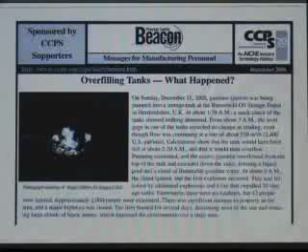Sunday, December the 11th, Sunday morning, everything is quiet. People are half asleep. They're not really paying attention to what's going on. 1:30 in the morning, stock check of the tank shows nothing unusual. Unfortunately, 3 o'clock in the morning, the level gauge stops working. So they're pumping in 2,400 gallons a minute of fuel, basically gasoline, and nobody's recording the level.

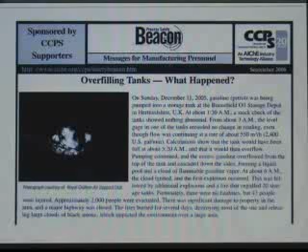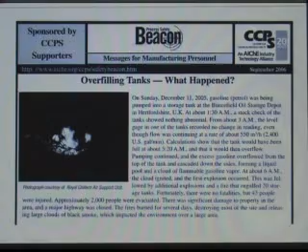And unfortunately, that means that the pump doesn't trip, and around about 5:20 in the morning, so that's 2 hours later, nobody's noticed, the excess gasoline flows over the side of the tank. And in those few minutes, until around about 6 a.m., I think it was 88,000 gallons of gasoline went over the side of the tank.

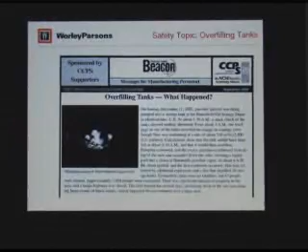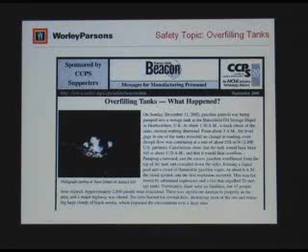Then we have what they call in the business an unconfined vapor cloud explosion. Basically, you've got an ignition source from somewhere, whether it's a spark, a passing car, or a static discharge. But once you've got the gasoline, the ignition source, the fuel, and the air, we had a massive explosion about 6 a.m. The explosion, according to the newspapers, registered 2.3 on the Richter scale. It's not a major earthquake, but it was a pretty good explosion.

Believe it or not, there were no fatalities, but 43 people were injured. This fire spread to another 20 tanks. So this is one tank, spread to another 20 tanks, and that is one of the biggest terminals in the London area, and it actually impacted flights in and out of London's airports because they were really short of jet fuel, and they were having problems refueling planes because this area just knocked out a huge amount of their supply.

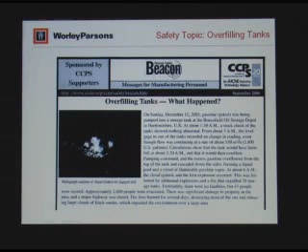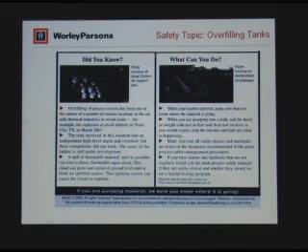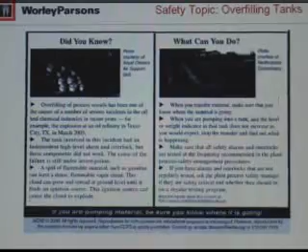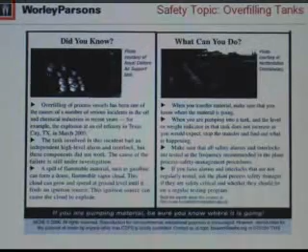Now, you might think that this is a relatively simple thing, but it can have catastrophic consequences. And basically, it's very similar to what happened at Texas City, where a bunch of people got killed in 2005. We had the overfilling of a process vessel, and the overfilled material went into a blowdown drum. The blowdown drum got to atmosphere and unfortunately ignited and killed a bunch of people. In the British incident, nobody actually got killed, but these kinds of incidents happen pretty frequently.

And they're easily avoidable, and they can be avoided by good process design with proper instruments and proper backups and things like that. But you also have to think a little bit about the system, and you need to monitor the system, because if you went into a service station and you filled up with 10 gallons of gasoline, maybe that's fine. 20 gallons, fine. But if you put 50 gallons in, maybe you start to think, well, how big is the tank? Maybe the gasoline's going somewhere else.

And this is really what people need to think about when they design systems. They need to monitor the systems. If you're pumping fluid in, you know roughly the pumping rate, you know how long you're pumping it, then you know roughly when the tank's going to be full. So you should be watching out for these situations. Obviously, they didn't set any kind of alarm, so when it hit 5 in the morning, nobody was watching, the stuff just overflowed.

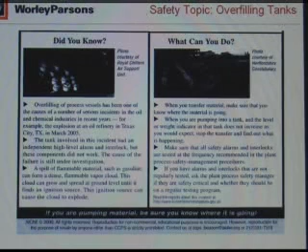And believe it or not, the stuff was on closed-circuit TV, so in the accident investigation, they were actually able to go back and view the whole thing on video. Obviously, nobody in the control room was actually watching it in real time.

Now, there's one other safety topic I have, which is a very interesting one. It's about static electricity in filling stations, petrol in Britain, gasoline in this country. Most of us are not aware that simple devices like cell phones are not what we call intrinsically safe. Intrinsically safe means that you can operate it in a hazardous environment.

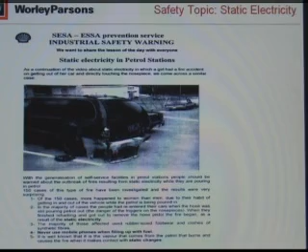So if you go into a refinery or something, normally you cannot carry a cell phone because electrically it's not intrinsically safe, so it may generate a spark and it may cause an explosion. Now the same thing can happen when you're filling up fuel. So you see people on their phones getting in and out of the car while they're filling up, and there are a significant number of fires.

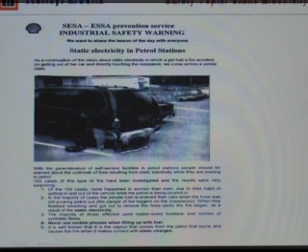You wouldn't believe it, but here they had 150 cases of this type where people have got in and out of the vehicle. Maybe they're wearing the wrong type of clothing, very synthetic clothing. Maybe the humidity was very low and the circumstances were bad. But if you've seen one or two of the videos of these, they can be quite frightening. Suddenly you'll see a flame right around the area where you're filling up.

And so there are several items of advice here. You're never supposed to use a cell phone or a mobile phone when you're filling up because it's not intrinsically safe. But you see people doing it all the time. They're on the phone, getting in and out of the car.

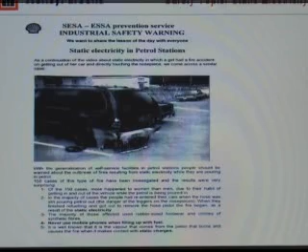And these other items here, basically, once you get out of the vehicle, close the door, fill up, but don't get in and out because you may generate a little bit of static electricity. And most of these cases were linked to that. And it's something most of us don't even think about. I've never actually seen one of these fires in real time, but I've seen the video, and I certainly wouldn't want to be there.

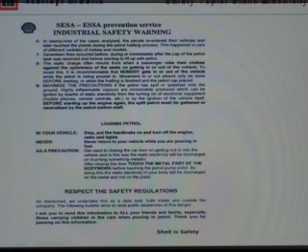So I don't know if there are any questions on that, but if not, we're going to move on to the main presentation, which is on delayed coking. Let me jump over to this. Now it's entitled Delayed Coking, but it's also subtitled Other Resid Upgrading Methods. And basically, I need to explain a little bit about what we're doing with a delayed coker and why you would use a delayed coker.

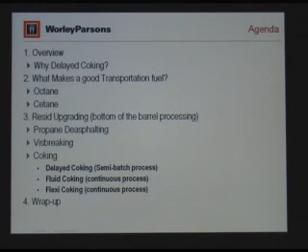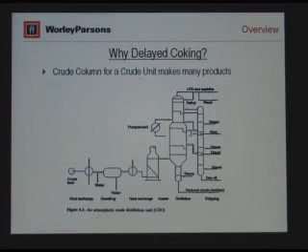All right, why delayed coking? This is a crude column. We start off with crude oil and crude tanks, and we feed through a preheat train, and we go through what they call a desalter vessel to remove salt from the crude oil.

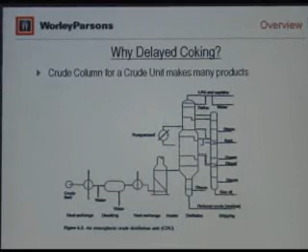When you transport crude, it goes largely through ocean tankers. You can imagine a huge tanker filled with crude oil. When you take the crude oil out, you end up with this big empty vessel, and you have to put in some ballast material, otherwise this thing's going to capsize and sink. So typically they use seawater, and therefore the crude gets contaminated with salt.

So we have to have a desalter, and then we go through some more preheat, and we go through a fired heater, and we go into just a straightforward distillation column, the crude unit. You've probably seen some of this before. And the major products we get, working our way down from the top: we've got LPG and naphtha. Naphtha is basically a gasoline boiling range material. Kerosene, that's jet fuel. Diesel, obviously for trucks and things. Gas oil is also a diesel boiling range material.

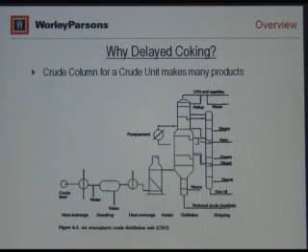And down here at the bottom is what is left. This is reduced crude or residue or resid. And as you can see, we can use these different products, but we end up with something that we basically have problems using. And you may not think it's very much, but this is an actual tower. You can't really see it too well.

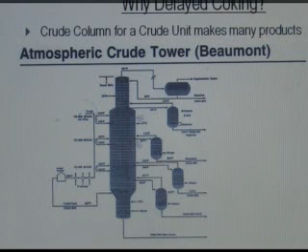These little side columns are what they call side strippers. They're used to control basically the vapor pressure, the quality of the product. So you inject steam or you use a reboiler, and you're basically returning light material back to the column. And then this is the product stream.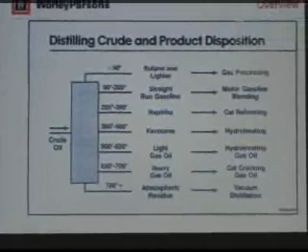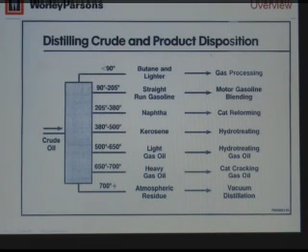All right. So as far as uses for these different fuels, we have naphtha, kero, light and heavy gas oil, which is a diesel range material. All of these things are all very useful, but then we end up with atmospheric resid, and it's this heavy, gunky sort of stuff. You obviously couldn't run a car on it, or even a diesel engine. So it's basically not a very valuable commodity. But obviously, if you can upgrade it somehow, then you can make use of it.

Now, you guys remember the movie Jerry Maguire, and in there was a phrase about "show me the money." And there was a famous bank robber called Willie Sutton who was arrested many years ago. And when they questioned him, they asked him, "Well, why do you rob banks, Willie?" And he said, "Because that's where the money is." All right? And the same is true in many other situations.

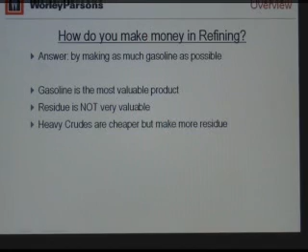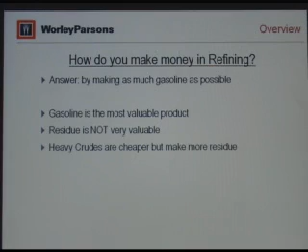If we move on to refining, how do you make money in refining? Well, you have to go where the money is, and the money is in gasoline. So basically, you would want crude oil to be converted as much as possible into gasoline. And that way you could make the most money, the most profit in the refinery. The gasoline is the most valuable. Residue is not very valuable.

Now you can run lighter crudes or heavier crudes. Heavier crudes are cheaper, but they make more residue. So you're making more of the less valuable material. But again, if you can find a way to use it and upgrade it, then you can use a heavier crude, which is cheaper, and again, you can improve your profitability.

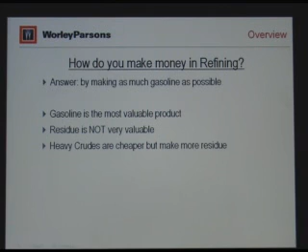Now, I mentioned we make a little bit of resid at the bottom of the crude unit, and you may think, well, it's not much of a problem. Maybe we'll just use it for asphalt or for other purposes. But the problem is, every barrel of crude oil ends up somewhere in the product slate. So if you bring in a lot of stuff, even if you only have a small percentage that you can't use, the stuff just accumulates.

So for example, if 10% of the crude is residue, and the crude feeds 100,000 barrels a day, then you get 10,000 barrels a day of residue. That's 420,000 gallons of the stuff. So you better have a good use for it. Otherwise, you're going to have a big, big tank to store the stuff in.

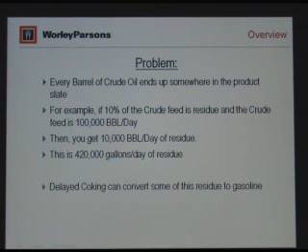Delayed coking can convert some of this residue to gasoline. Not all of it, but some of it. So obviously you can take a low-value product, you use a delayed coker, process it, and you can produce some gasoline. So you've upgraded the value.

Now, to give you some idea of capacity, in this business we talk a lot in terms of barrels a day, and I wanted to give you a feeling for what's a big refinery, what's a little refinery. The biggest refinery in the continental United States is Exxon's Baytown, Texas refinery. I thought its capacity was around 650,000 barrels a day. According to their website, it's only 563, so I put 563. Chevron El Segundo, which is right next to LAX, that's about 250,000 barrels a day. That's also a pretty large refinery.

ExxonMobil in Torrance is 155,000 barrels a day. And then there are other refiners which are around 100, 120. And a small refiner might be 50,000 barrels. That's a relatively small refinery. But it gives you a feeling for the size of a unit and the size of what we talk about with a barrel. And a barrel is just 42 US gallons. So multiply by 42, you get the number of gallons.

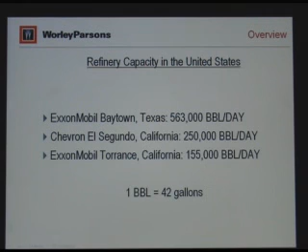Compare that with Concorde. Concorde, of course, goes twice as fast, burns 5,900 gallons an hour, and only gets 14 miles per gallon per passenger. So that's less efficient, but maybe more fun.

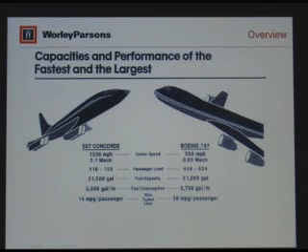You know, I never flew Concorde myself, but two of my family, my dad and my brother, both made trips on Concorde. So it's quite an experience. So you're actually flying faster than a rifle bullet, which is hard to think about, twice the speed of sound.

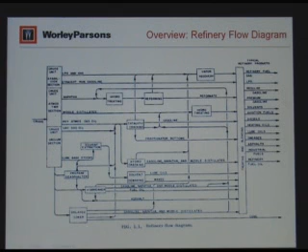All right, a refinery, this is an overall flow diagram, and I think you've seen diagrams like this in some of the previous training classes. This area is the crude area, an atmospheric tower and a vacuum tower. And then the various units we're going to talk about today, we've got resid coming here, we've got a propane deasphalter, a visbreaker, delayed coker, and various things like that. And these are the different products on the right-hand side that you make.

To give you an idea of what these products are like, here for liquefied petroleum gas, or LPG, that's the kind of stuff that you use for your backyard barbecue. It comes in the cylinders. Carbon number C1 to C4. And this is the boiling range.

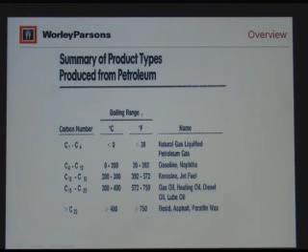Gasoline and naphtha, C4 to C12. Kero and jet fuel, this range, and gas oil, heating oil. And then you can see down here is what we're left with, the resid, asphalt, waxes, stuff like that.

Now, we talked a little bit about a crude distillation unit before. This is a typical example of one. Again, we've got a fired heater, the desalter, the main crude column. Sometimes we call it an atmospheric tower, the way they call it here. It operates just a little bit above atmospheric pressure, maybe 10 psi, somewhere in that sort of range. It's not a very high pressure. And then these are these side strippers that improve the product quality.

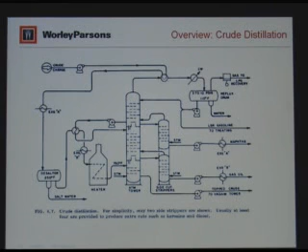Now, the first thing that you can do with resid is to use vacuum distillation, and we'll talk a little bit more about that later on. But basically, you take the atmospheric resid, or here they call it topped crude, but it's the same thing. Put it through a heater, and you put it now through a vacuum column and do a vacuum distillation.

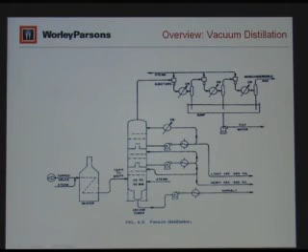And this is actually quite a low vacuum. See, 25 to 50 millimeters of mercury, and 760 millimeters of mercury is 1 atmosphere. So this is pretty low vacuum. And instead of making just light gas oil and heavy gas oil, they call it light vacuum gas oil, heavy vacuum gas oil, and of course the other remaining material.

Now, we'll come back to the processing steps in a minute, but we need to go over one or two things that I think were covered in the previous classes, but very often they pass people by. We have to think a little bit about what makes a good transportation fuel. So we have a refinery, we have things like a crude unit, we have all these other myriad of processing units. Somehow you have to maximize profit but also make a decent fuel, because if you don't make decent fuel, people are not going to buy your stuff, and you're not going to be allowed to sell it because it's not going to meet spec.

Now, gasoline has a whole range of specs on it, but the primary one is that you need a good octane number. And diesel has a similar number. It's called a cetane number. Now, it turns out, very luckily, high octane liquids generally have low cetane, and high cetane liquids generally have low octane. So basically, you separate it out, you end up with a nice high octane material and a nice high cetane material. And things like aromatics, for example, benzene, toluene, xylene, those have high octane, but they don't have very good cetane, so you'd want to put them in the gasoline pool.

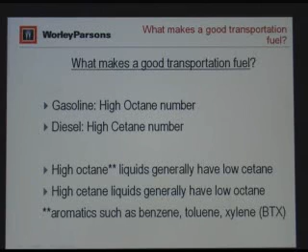Now, as we'll see in a few minutes, even though you may want to put them in the gasoline pool, you may be aware there are regulations against some of these things. So you cannot always put in everything you want. And we'll see it's sort of a game of the way the refiners have produced fuel, and the way that the air pollution rules have developed over the years.

Now, octane is for spark ignition or gasoline-powered engines. Octane measures the ability to burn smoothly and uniformly without an explosion or a knock. And there are two types of ways something can burn. There's what they call a deflagration, which is a nice smooth burn, and then an explosion or detonation. You get a shock wave, and that shock wave damages the cylinders, because you end up with the shock, and then you get the wave hitting the equipment, and the engine knocks. And people with good hearing can actually hear the engine knocking.

So if you produce a fuel with high octane, the engine will not knock. Low octane fuel, the engine will knock, and obviously you end up eventually with damage to the engines, the loss of power, and things like that. So it's not a good fuel.

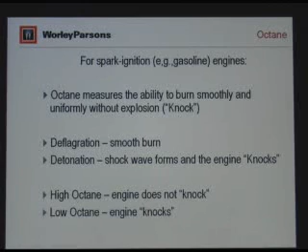To measure octane, there are a couple of different ways of doing it. There's what they call a research octane number, and there's a particular test, and they update these tests over time. So ASTM, there's a whole bunch of ASTM tests for different types of products. There's a research octane number and a motor octane number. And what you actually see on the pump in the United States is the RON plus the MON divided by 2. So research octane number, the motor octane number, and then you divide it by 2. So when you buy 87 octane, it's R plus M over 2.

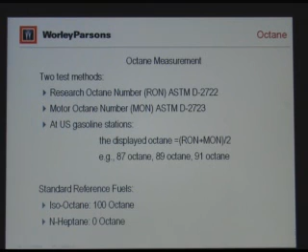And to give you an idea, the standard reference fuels: isooctane is 100 octane, and normal heptane is 0. So that's how they assign the octane numbers. But basically, you know from your own driving experience that you've got 87, 89, and 91. And so you need something in that sort of range if you want to put it in gasoline.

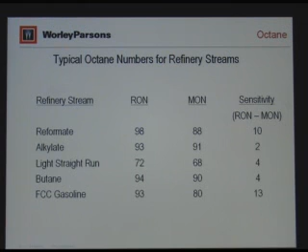Now, if you look for typical refinery streams, the light straight run gasoline is the gasoline that comes straight off the crude column. It doesn't go through any other processing. That's why they call it straight run, because it's got a straight run from the crude tanks through the crude unit straight into the blending pool. The problem with light straight run, you can see 72 and 68. Sensitivity is just the difference between them.

Something that's 72 octane, when you need an 87 octane to sell it, that's not very useful stuff. So obviously you have to blend something in this to get it somewhere closer to 87 so that you can at least sell it. And these other streams, reformate comes from a reformer. Basically, a reformer makes aromatics, and so you can see it's got a 98, 88. It's got a very, very good octane. Alkylate has reasonably good octane.

Butane, which is very light material, like lighter fluid, that's a pretty good octane. FCC gasoline, this is a fluid catalytic cracking unit. It's a cracking process. So you end up with these blend streams, and then you have a little linear program and various other techniques to try and blend something that will meet the octane requirements.

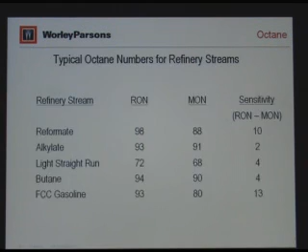Now, in the past, the easiest way to get some octane was to blend in tetraethyl lead. And that made what we used to call leaded gasoline. And that's still, I think, used in some parts of the world. But basically, in this country, we don't use it anymore. But these are the main methods for improving octane. You can either add lead, add butane, increase the aromatic content, or you can process it with processes such as alkylation. We'll talk just a little bit about that.

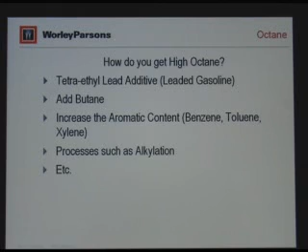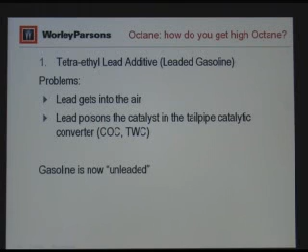Now, the first thing, tetraethyl lead, as I mentioned, it's now banned in the United States for several reasons. First of all, the lead gets into the air, and it poisons the catalysts in the catalytic converters that you have in the tailpipe of a vehicle. So basically, gasoline now has to be all unleaded in the United States and in California. There's maybe some leaded gasoline that's available for old farm machinery or something like that, but basically it's all unleaded.

Second thing that you can do is to add butane. Butane is relatively cheap. You add it to gasoline and it will raise the octane number. But there's a problem. When you add something very light, then it's going to increase the volatility of the gasoline. It makes it evaporate more easily. And that increases the vapor pressure of gasoline. And with gasoline, the critical vapor pressure is what we call a Reid vapor pressure, or RVP. It's measured by, again, an ASTM test. It's basically the vapor pressure in PSI absolute at 100 Fahrenheit, roughly speaking. There's a special test procedure that you have to follow.

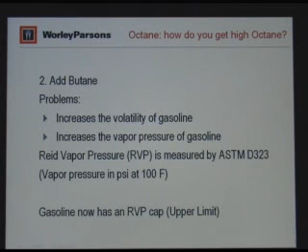Now, the problem is, if you make the gasoline too volatile, then you get a lot of emissions into the air, evaporative emissions, so you get smog. So basically, gasoline now has an RVP cap, or an upper limit. So you can see we're kind of in a game of cat and mouse here, that everything we find to add to the gasoline pool ends up getting either regulated out or restricted in some way.

Now, the next thing we have is to increase the aromatic content: benzene, toluene, and xylene. Basically take a naphtha stream, you process it in a reformer, and one type of reformer is a CCR, continuous catalytic regeneration reformer, and you basically make aromatics and you produce hydrogen. And that's a very useful process, because the aromatics are high octane, and hydrogen is very useful in a refinery for hydrotreating processes and this sort of thing. So most refiners, if not all refiners, have a reformer of some type. It may not be a continuous catalytic regeneration reformer, it might be an older type, but basically this is a good process, but obviously there's always a downside.

Benzene is carcinogenic, causes cancer, and so in California benzene is limited. These are the 96 regulations. It's limited to 1% by volume. I think they're either reducing it down to 0.8 or they're trying to reduce that even further. But let's say 1% or less. Aromatics limited to 25% by volume. So you can put some aromatics in.